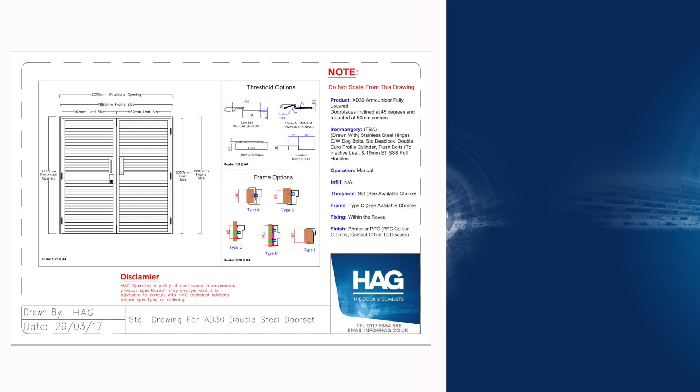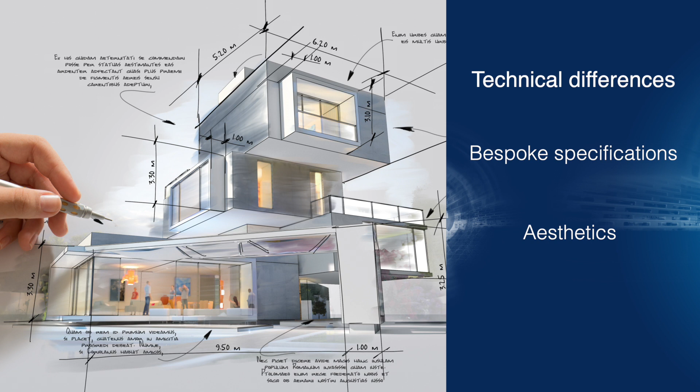We will detail the technical differences between various products, as well as bespoke specifications, aesthetics and accessibility, as instructed by the Equality Act 2010 and in conjunction with approved Document M guidance, along with energy performance.

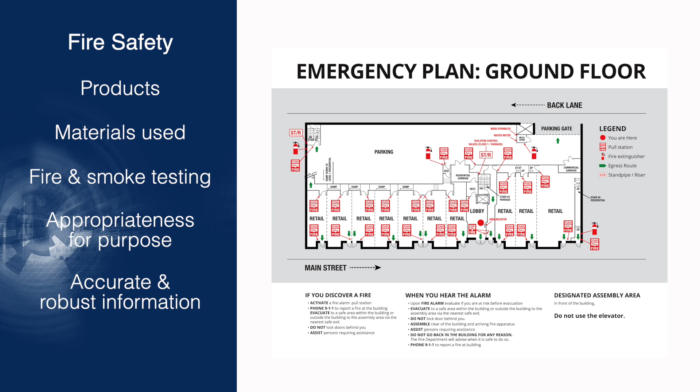We shall talk further around the crucial and ever-focal area of fire safety by providing clear and concise technical information about the products, the materials used, fire and smoke testing, appropriateness for purpose, and how this accurate and robust information can help you in your wider design perspective, but also meeting the practical needs of the fire strategy plan.

This will be in conjunction with the recommendations and guidelines as laid out in British Standards BS 9999 for commercial premises and BS 9991 for residential dwellings.

Finally, we shall discuss inappropriate applications, examples of how inaccurate technical information might lead to an unsafe or unwise specification and how this can be adjusted to an appropriate application, and long-term maintenance, what and how you might need to consider and factor this into your design and specifications, before concluding the training video and moving on to the assessment questions to check your understanding of what we have covered.

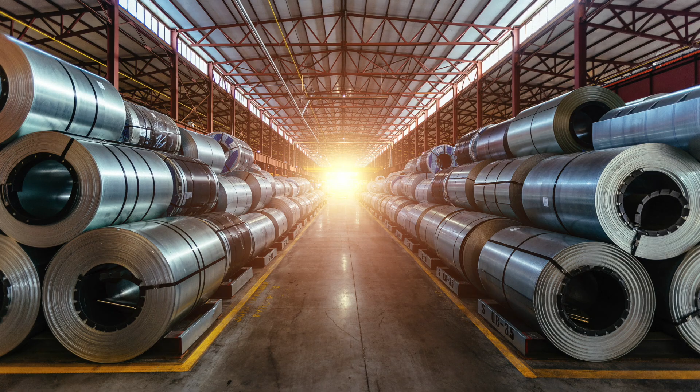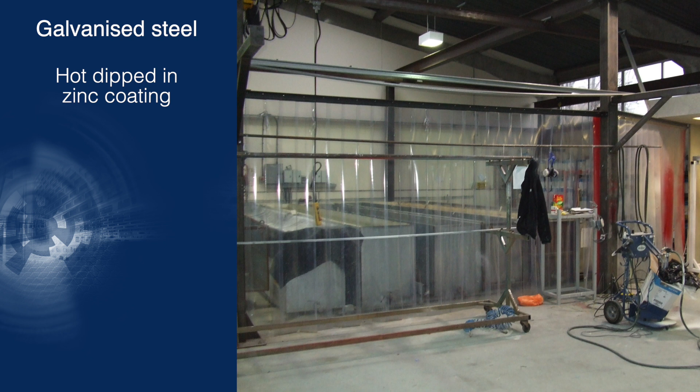There are various classifications and grades of steel, but for the purposes of this training video, we shall discuss galvanised steel and Magnelis steel. Galvanised steel is steel that has been hot dipped in a zinc coating. This protects the metal from the effects of rust. The hot dip process is unique, producing a coating which is bonded metallurgically to the steel.

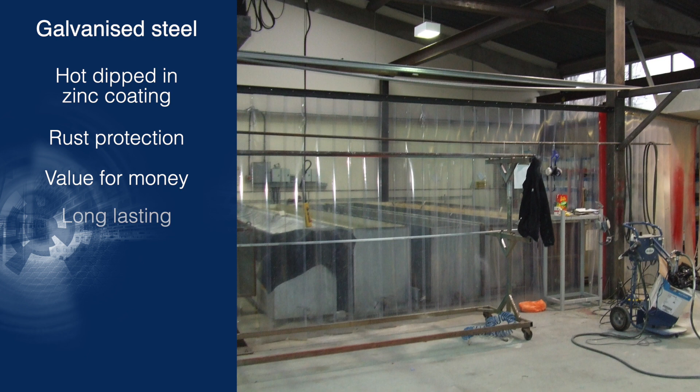The benefits of galvanised steel have always been recognised as good value for money, long-lasting, reliable, easy to maintain and provides instant protection. Magnelis steel is an alloy composed of zinc, aluminium and magnesium.

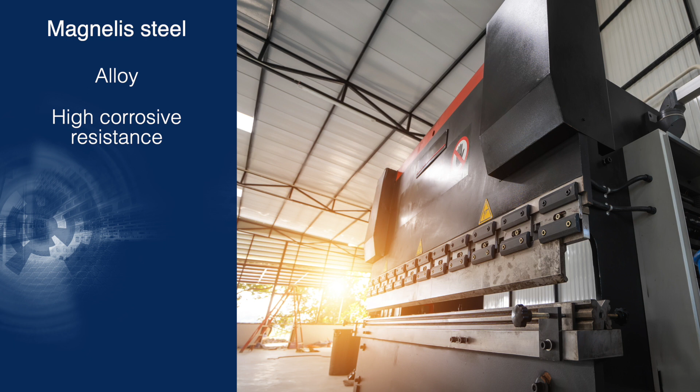It offers a similar aesthetic to galvanised steel but has many different benefits. As a steel-coated product, Magnelis offers a high corrosive resistance that can be up to 3 times better than that of galvanised steel. It is therefore also able to withstand some of the harshest environments in the world, particularly where there is exposure to ammonia or chloride.

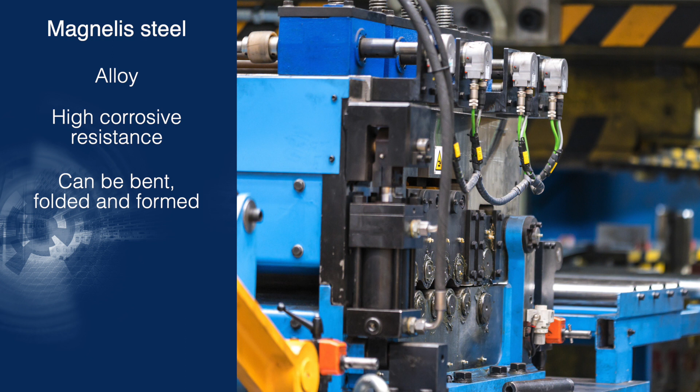Magnelis steel can be bent, folded and formed to provide a consistent, reliable finish. As the steel is already coated, the manufacturing time is significantly quicker.

Steel is not only 100% recyclable, it is also currently the most recycled material in the world. Just as designers and architects engage in schemes such as BREEAM, it is as important that manufacturers should recognise the benefits of sustainable materials and their impact in environmental performance.

British Steel has prioritised the use of external recycled content in recent years, and they are certified as good in relation to the standard as shown here.

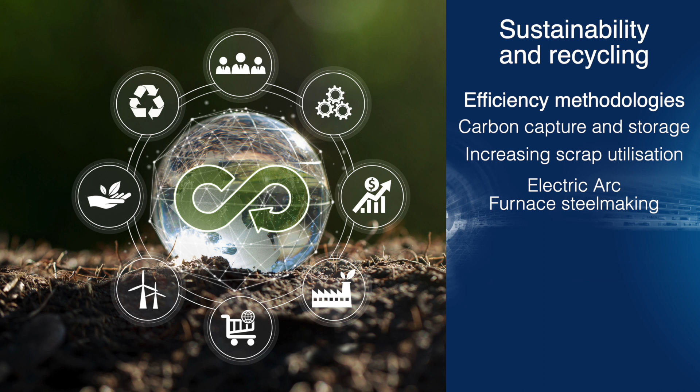UK importers of steel and manufacturers have a responsibility towards sustainability and recycling too. Therefore, when specifying these products, you can do so in the knowledge that you can secure additional credits under the various sustainability schemes as shown here.

It is imperative that your steel doors are regularly serviced, whether mechanical or manual. Full details of servicing obligations can be found in Regulation 5 of the Workplace Health, Safety and Welfare Regulations 1992. This should also be assessed in conjunction with the Fire Safety Order 2005, where it states that all emergency doors must be regularly serviced.

According to the local government association, failure to provide adequate fire safety measures can be punished by a fine, which is currently of up to £5,000 in the Magistrates' Court, or by an unlimited fine and/or 2 years imprisonment in the Crown Court.

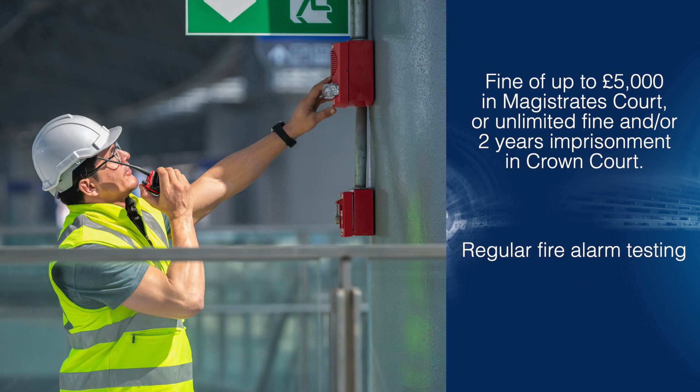Fire alarm testing by the building management's team should be carried out on a regular basis. Testing that the steel door sets are in full working order and close when they receive the signal from the fire alarm, if they are mechanical, should also be incorporated into these routine fire checks.

Following the Grenfell tragedy in 2017, a review was conducted of the existing fire safety and building regulations. This led to the establishment of the new Building Safety Act 2022, which is now in force. This key piece of legislation has been implemented to enhance building safety and change the way in which buildings are designed and constructed. Alongside this, the Fire Safety Act 2021 was also introduced.

This Act provides further clarity around where the responsibility lies for managing and reducing the risk of fire posed by the building's structure, most notably in relation to external wall systems, such as windows, balconies and entrance doors.

For a full summary of the Act and to understand how this new legislation relates to steel door specification, please visit www.gov.uk. A further amendment to government legislation as a result of the Grenfell inquiry is the introduction of Regulation 7 within the approved documents Part B.

Part B contains guidance on fire safety, including means of escape, fire spread, structural fire protection and fire service access, and bans the use of combustible materials in external walls. Please refer to www.gov.uk to read more about the key changes to this specific legislation and how it affects you.

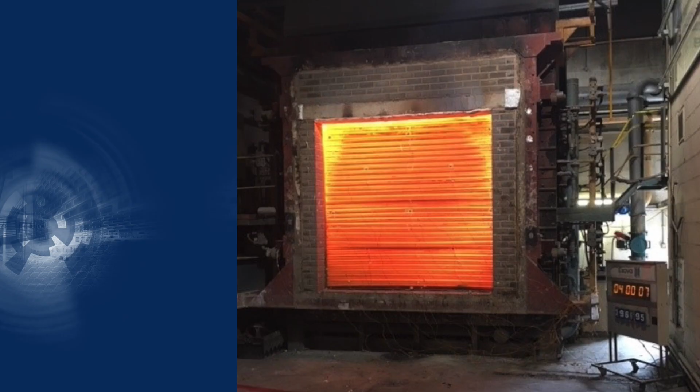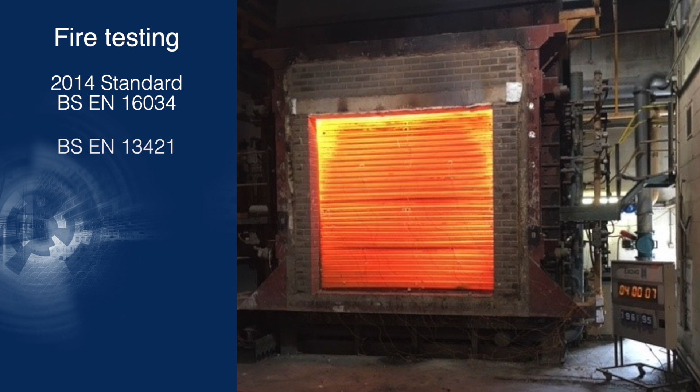In November 2019, new government legislation was brought into effect. All new fire products must be fire tested to the 2014 standard BSEN 16034, CE marked to BSEN 13421. Products tested to the 2008 standard are prohibited by law. It is essential that you check this before specifying a fire protection product, as products tested to the 2008 standard are still being marketed in the UK.

With regular maintenance and testing of steel doors, your premises will be compliant to the current Health and Safety Act 1974, which stipulates that all equipment should be suitable for its intended use, safe to use, in good repair and subject to a programme of maintenance.

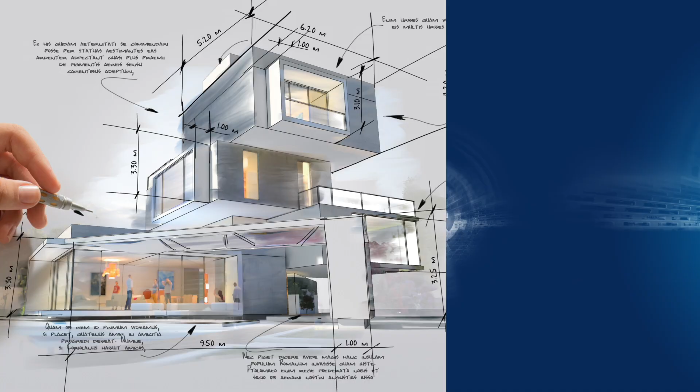www.hse.gov.uk. The key considerations to specifying steel door products and the designer's main duties, as just outlined, are to research and select products accordingly that meet the previously described areas, which include but are not limited to statutory and regulatory compliance, sustainability, and inclusive environments.

To ensure legal, safe, compliant, fully tested products are specified to avoid any risks arising during the build, the use of the products, or the maintenance of the products within the building once works are complete.

Now we shall look at ways in which you can meet your specification needs by discussing energy performance, product technical specifications, bespoke specifications, aesthetics, inappropriate applications, and long-term maintenance.

We shall start with energy performance. When incorrectly specified, doors can have a devastating effect on a building's insulation system. This is even more pertinent where the goal is performance related to building certification.

It is estimated that the carbon footprint of opening the front door of your home on a cold winter's day is 3 grams CO2e. This rises to a comparatively staggering 83 grams CO2e when big electric doors open into a large stairwell on a cold windy day.

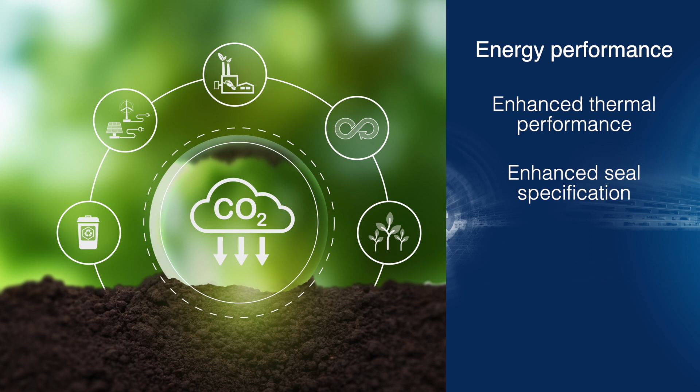Enhanced seal specification. Standard seals are offered to provide good value for money. However, if one of your goals is to prioritise energy efficiency, you can select from a bespoke range of seals that enhances the overall seal effect.

Selecting manual over electronic operation. Certain steel door solutions are offered in either a manual or electronic operation.

In some circumstances, your overall specifying criteria may override your ability to choose. However, where possible, you may wish to opt for manual operation to minimise the energy used to activate the open door.

The appropriate use of glazing and louvered panels. There may be times when you are requiring louvered panels to offer ventilation and bidirectional airflow, or glazed vision panels to comply with the Equality Act 2010, or Approved Document Part N.

When you do have a need to specify these features, ensure that you are being offered high-quality double glazing to manage your building's energy performance accordingly. Where possible, don't add these features unless a necessity, so you aren't creating extra areas in the door for energy loss.

Sizing of the door sets. Whilst large stylish steel doors in a brushed steel finish opening onto an expansive atrium entrance hallway will look impressive, consideration must be given to the size of the opening in order to fully enhance energy performance.

It's a basic principle: the larger the opening and size of the door, the more energy from the building will be lost each time the doors open. Scale back large openings with the use of side and over panels, allowing for a smaller door size whilst not compromising on the aesthetics.

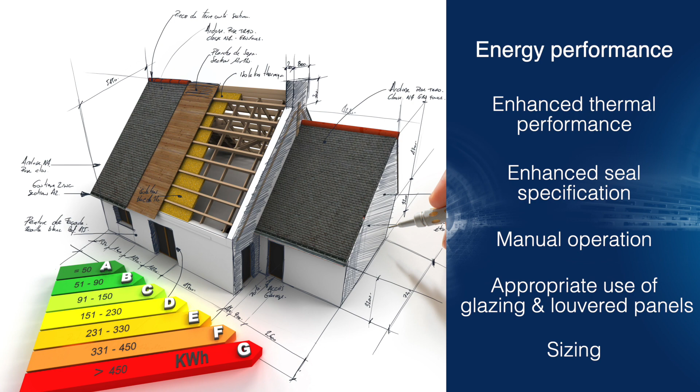Now we shall discuss steel door products and their technical differences, bespoke specifications, and aesthetics in more detail to show you how you can use them to meet your needs.

A general purpose steel door is versatile, offers a medium level of both security protection and thermal insulation, and is suitable for high frequency use.

You can specify from manual or electric operation, and they are available in single or double leaf openings to a maximum height of 2,900 mm.

They are available in a range of finishes from powder coating, wood grain, and PVC laminate. Stainless steel door skins are also available, which can be brushed, polished, or patterned.

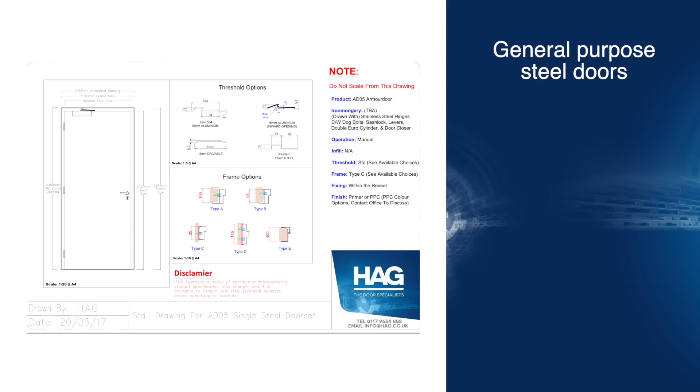The wood grain PVC laminates come in 3 finishes: beech, golden oak, or Nordic oak, to suitably complement your aesthetic look. The 2 door blades are lock formed together by bonding skins around a rigid core using a no weld construction technique.

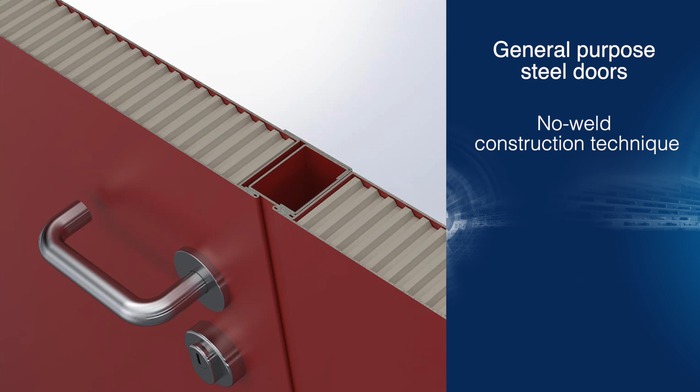As standard, the door thickness will be 45 mm and would have a self-supporting resin-impregnated honeycomb core with a thermal U value as shown on screen.

The door frame is constructed from folded 1.5 mm Magnelis steel, with an upgrade option of 2 mm, and are supplied with an adjustable subframe which provides 30 mm tolerance for ease of installation on site. The frame is fitted with 4 dog bolt hinges as standard.

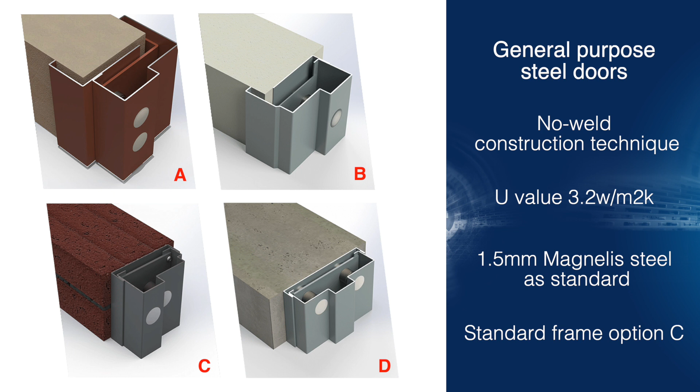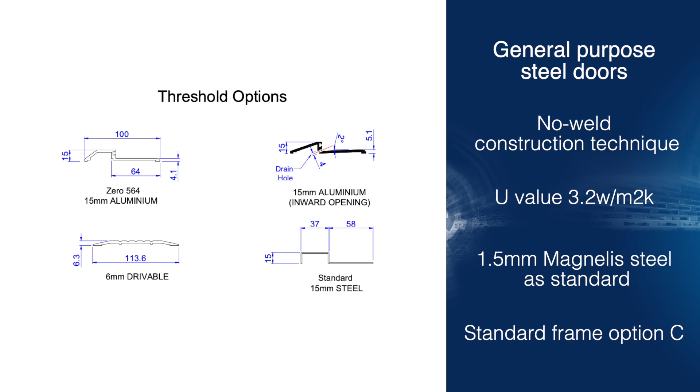There are 4 profile options as shown on screen, with types A and B being available in both inward and outward opening versions. These doors would be supplied with a 15 mm rebated threshold, which is in compliance with the Equality Act 2010. There are 4 further options shown here, including a ramped drivable threshold.

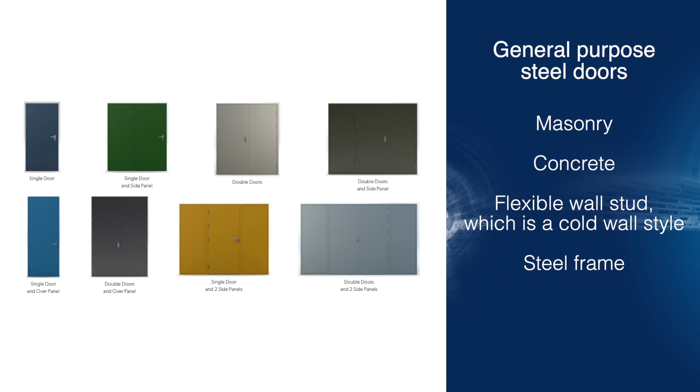Fire doors are mandatory in all buildings, whether residential, commercial or industrial. They must open in the direction of escape, must be a manual door not sliding or revolving, and must not be locked or fastened in any way that they cannot be easily and immediately opened by any person in an emergency. Steel doors are perfect to meet these needs as they offer a medium to high level of security protection whilst also being suitable for high usage.

Ensuring that your fire exit signage is both correct and clearly visible is paramount. The sign should clearly indicate that this is a fire exit door and to keep clear. The keep locked sign must be present where applicable. Specific legislation relating to signage can be found in the Health and Safety, Safety Signs and Signals Regulations 1996.

The sizing options, finishes, construction and infill options are similar to a general steel door. However, fire exit steel doors are supplied with a single or 2-point panic bar or push pad as standard. To comply with Approved Document Part M, visibility glazing can be specified. There are minimum zones of visibility as shown on screen to achieve Part M compliance.

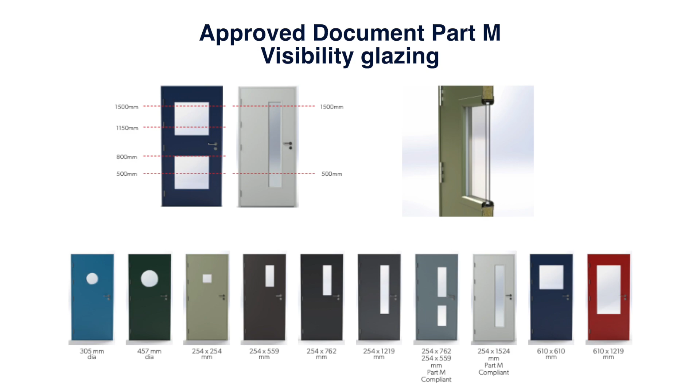Fire-resisting doors will generally be offered in 3 different levels of fire resistance, also known as integrity and specified as an E number. These are 30, 60 or 120 minutes.

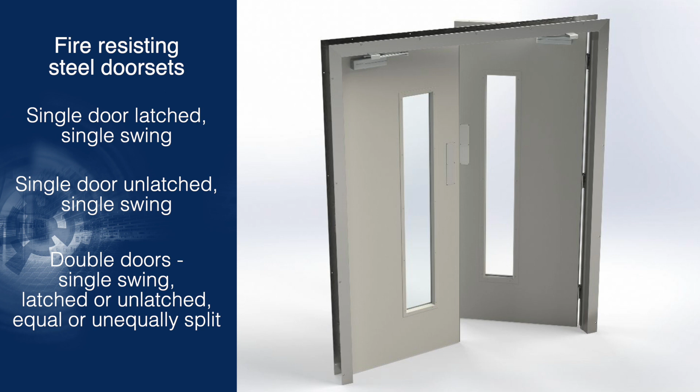All fire steel doors are custom made and have the option to be single door latch single swing, single door unlatched single swing, or double doors single swing, latched or unlatched, equal or unequally split. The maximum size will vary depending on the specified fire rating.

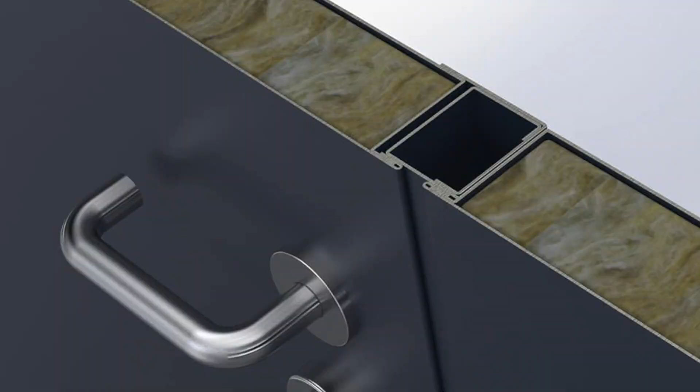A standard infill should be self-support resin impregnated honeycomb, with an option of mineral wool should you need to improve acoustic performance. The door frame construction will be screw and tab, with 4 adjustable fixing feet per jamb. A variable subframe accommodates site tolerance up to 30 mm, and the frame will be fitted with 3 Class 13 hinges with 2 dog bolts.

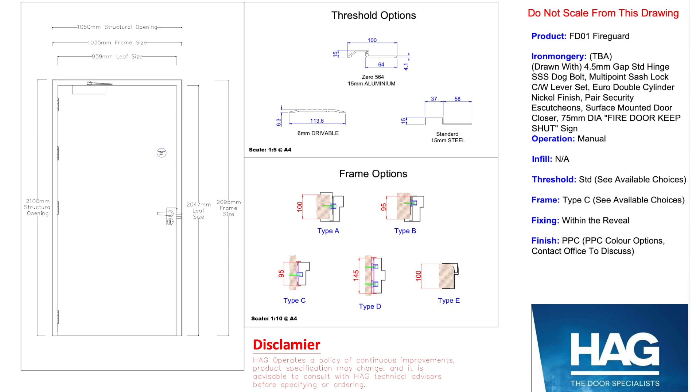Similarly to general steel doors and fire exit doors, fire doors can be used in all walls constructed of steel frame masonry, concrete and similarly rated stud wall. It is worth noting that when using timber or steel stud walls, you must ensure that you have adequate evidence that the wall can support a steel fire door under fire conditions.

120 and 240 rated stud wall constructions must have the wall's reveal face protected by a fire-resisting board to protect the wall construction. The addition of visibility glazing allows for Part M of the Building Regulations compliance, which states that doors across routes of access should have vision panels.

The vision panels are constructed by welding 1 mm of cold rolled steel, screwed together from one side with laminated glass and intumescent fire-stopping gel as standard. A common option would be a 19 mm double glazed unit. Other custom sizes of glass are available at additional cost.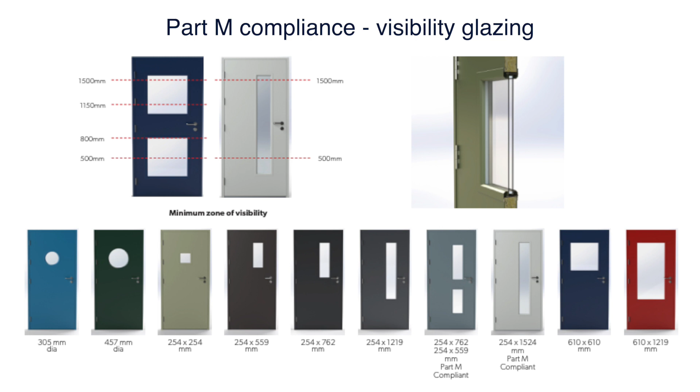Vision panels can be round, rectangular or square. However, compliance to Part M would only be relevant to the shape and placement of the panels, just as shown on screen. Certain sizes of vision panel would exceed the maximum area for a 240-minute fire-rated door, as it would compromise its ability to protect against fire.

It is possible to use these products in a larger opening with the use of side and over panel arrangements. These could be solid or glazed, subject to your requirements. Standard sizes are detailed on the screen.

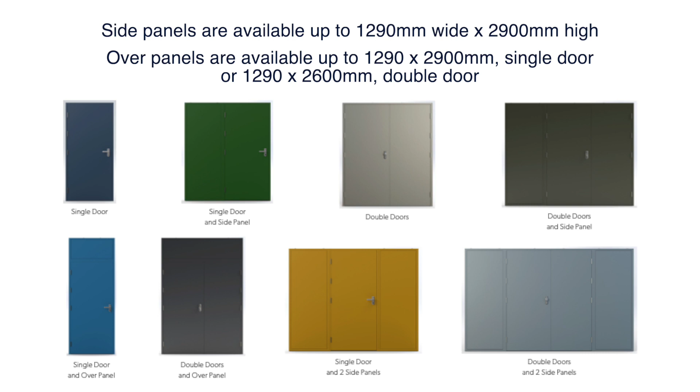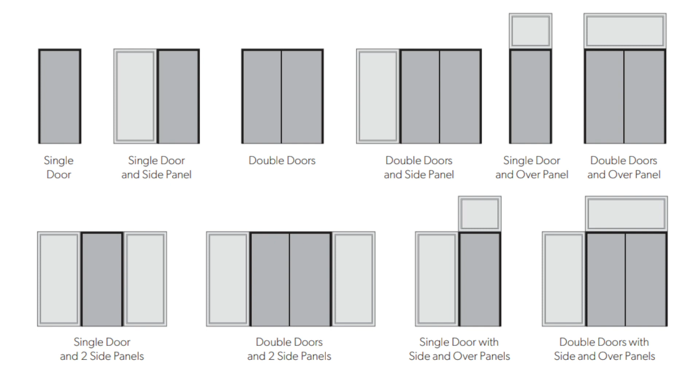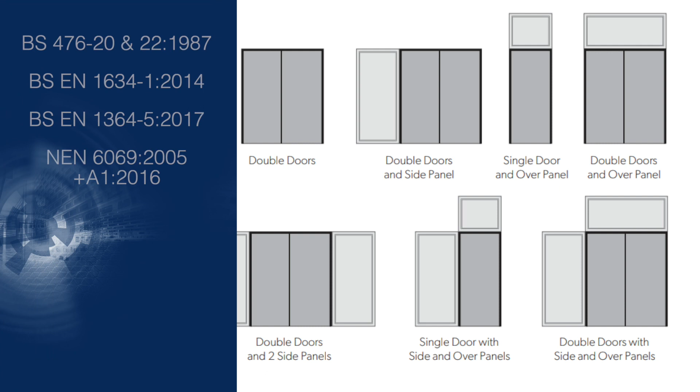Where ventilation is key, you also need the protection of a fire-rated steel door. You can opt for a louvered panel in the form of a high-performance intumescent air transfer grille. Examples of areas where this might apply are a plant room, stores, computer room or manufacturing areas.

These louvered grilles have been tested to the standards as shown on screen. They can provide up to 60 minutes of resistance to fire, or 120 minutes when used in conjunction with a grille cover. Standard sizes range from width and length of 98 mm, increasing in increments of 25 mm up to a maximum of 598 mm.

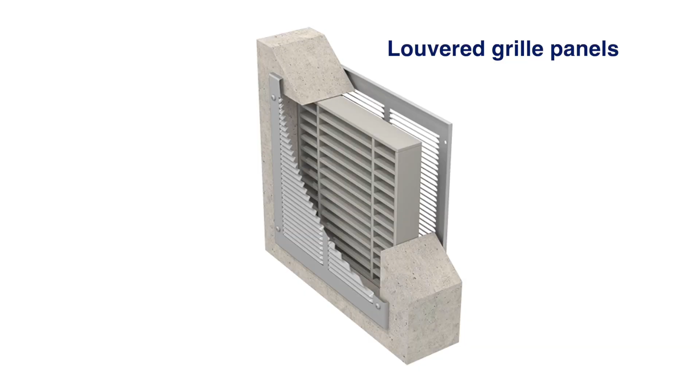These are constructed from 40 mm thick intumescent air transfer grille, with 2.5 mm thick steel cover grilles, one on each side, which are face fixed to both sides of the door. The air transfer grille expands under the effects of heat, therefore sealing the unit and preventing flames and smoke from passing through it. The air transfer grilles are manufactured from PVC slats with an intumescent core.

Steel cover grilles are manufactured from 20 SWG mild steel with preset angled vanes at a 30-degree downward deflection and 8.5 mm pitch. These vanes allow for bidirectional airflow. The grille is then screwed and bedded in intumescent sealant to guarantee the seal.

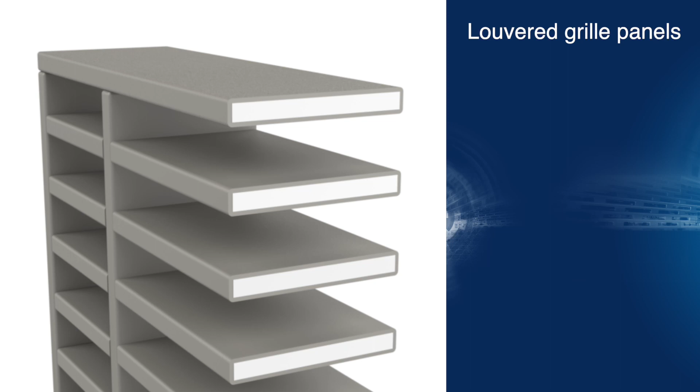Other benefits include no moving parts, not prone to clogging, no access panels required, robust construction, and no maintenance. They provide excellent airflow characteristics, which results in low sound power level, efficient operation, as well as still giving you the excellent fire integrity performance that you require in such settings. Ideally, they should hold the Certifire accreditation.

Louvered steel doors are to be specified for locations where you require continuous airflow, such as plant or boiler rooms, or refuse rooms. They offer a medium level of security but no thermal protection, are manually operated, and can be manufactured in both single and double openings, with a maximum recommended height of 2,900 mm. Optional side and over panels can then be added to suit larger dimensions.

Louvered steel doors are made to order and can be offered either fully louvered or as a steel door with louvered panel inserts, offering various levels of ventilation. All louvers are available in steel or aluminium.

Steel is more robust, therefore providing you with a product meeting a higher level of security versus the more traditionally lightweight aluminium option. The louvered door has a leaf thickness of 45 mm, and the steel door blades are made from 2 mm corrosion-resistant Magnelis steel as standard.

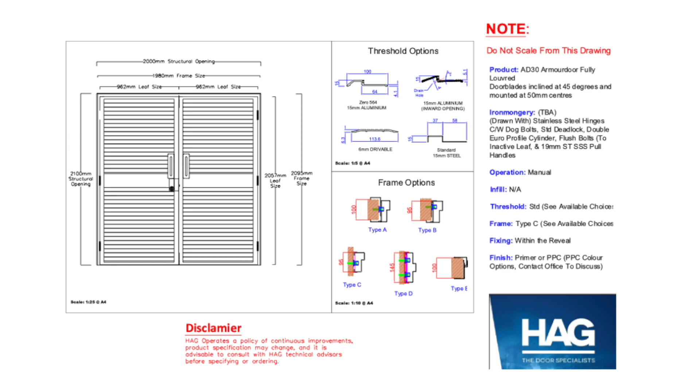The louvered steel door is supplied with a variable subframe to allow up to 30 mm tolerance for site installations, and the frame is fitted with 3 stainless steel hinges and 2 dog bolts per hinge as standard. The door is supplied with a standard 15 mm rebated threshold. Drivable thresholds are also available on request.

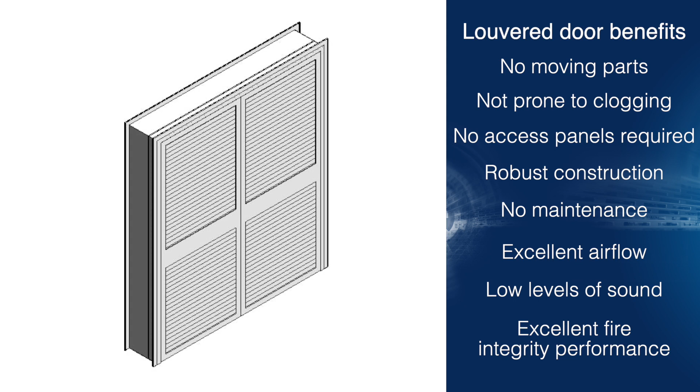If your specification requires a higher level of strength and security, you can select a 2 mm galvanised steel louvered vane that is welded at every junction for added strength. These louvers are certified to PAS 24 and are approved by Secured by Design.

There are various bespoke hardware options that will include mortise lock and latch options, as well as mortise multi-point locking options. Additional locks can be fitted with panic bolts and latches to provide nighttime security. Locking and access control options might include mechanical keypad, electric strike, electromagnet lock, either surface mounted or with a concealed mounting.

It is possible to specify steel doors with insurance approval for use in areas of high risk. This is called LPS 1175 and is run by the Loss Prevention Certification Board. These door sets are designed to offer an enhanced level of security for a wide range of premises, from domestic all the way through to premises that might be at high risk of attack by experienced intruders.

They are manufactured by specification to meet security rating and insurance levels of Security Rating 2, SR2, through to SR5. These steel doors can be used in areas of high usage and generally offer a medium level of thermal insulation. Each door has internal reinforcement and specialised construction designed to resist sustained attacks using an extensive range of tools. The tests on the SR security steel doors are carried out under laboratory conditions using attack times and tools defined by the security rating that the product is suitable for.

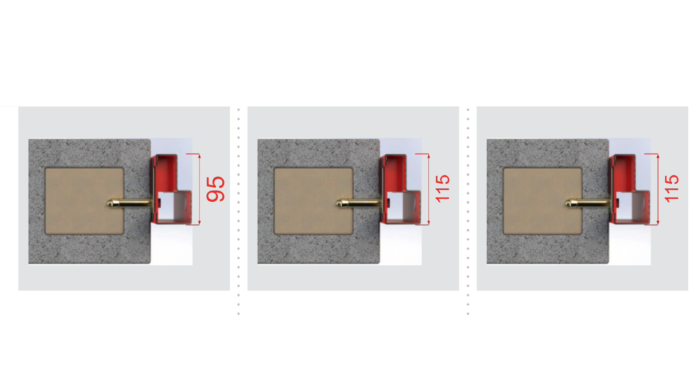The wall construction opening must be fully formed from a material with sufficient composition strength to withstand a minimum load or fixing as detailed here, such as concrete, brick or steel frame. Aerated concrete is not recommended, and hollow brick or blocks should only be considered if suitably backfilled with materials that will provide adequate strength to take the frame fixings.

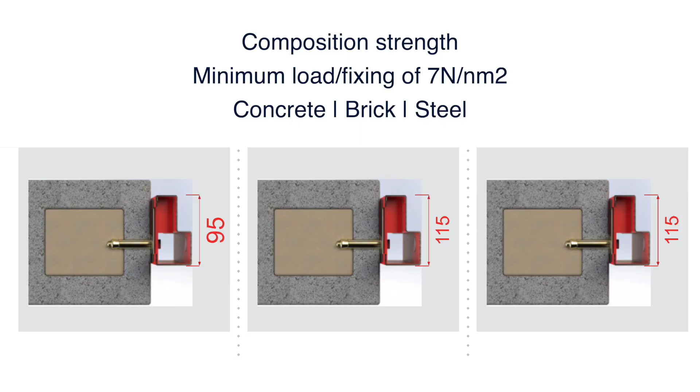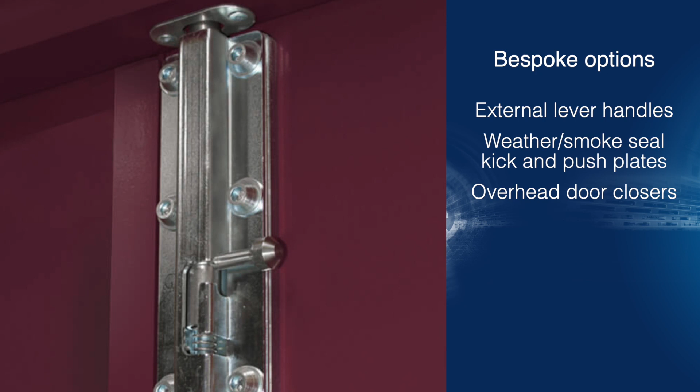Most SR doors can be fitted with a selection of vision and louvered panels without compromising the levels of security. Other bespoke specification options might include external lever handles, weather or smoke seal kick and push plates, overhead door closers, heavy-duty door stays, alarm contacts, electronic lock status monitoring system.

A wide range of internal and external locking options will be available, complying with the SR certification, including a single-point locking device, emergency escape, key-driven and electronic mechanical access control systems. Fire escapes can be fitted with hardware compliant with BSEN 1125 or BSEN 179.

Hinge options will be matched to the SR door you specify. Generally, all SR doors will have a minimum of 3 stainless steel hinges, which have been endurance tested to over 2 million cycles, recessed into the door leaf. Independent steel hooked dog bolts will then be used with a reinforced anti-crush fixing.

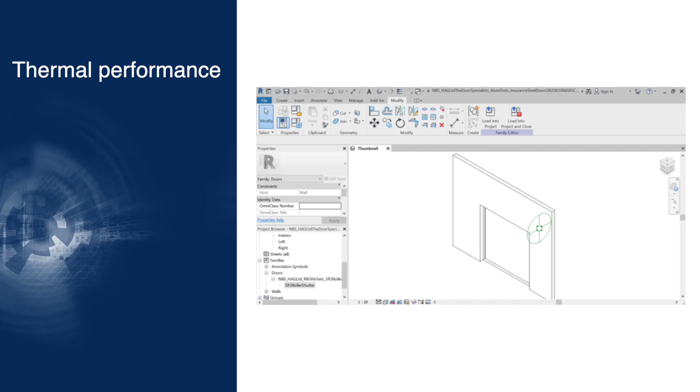There are many factors that might affect the thermal performance assessment of these specialist doors. The U value for a standard SR door is calculated to be up to 2.5 watts per meter square Kelvin. When the same door was fitted with a vision panel, the U value can go up to 3.2 watts per meter square Kelvin.

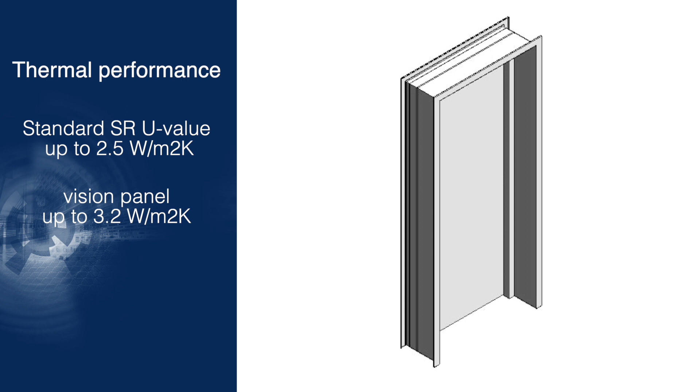Door hardware options will all be high security, single and multi-point locking with a range of emergency exit features. These should be certified according to LPS 1175 and the relevant SR level.

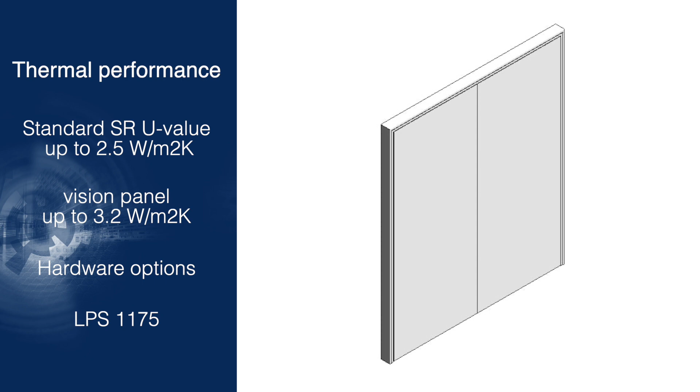Blast-resistant steel doors are specifically designed and tested to the explosive resistance standard. These steel doors are manual operation and come with 3 locking points. High-security patent-protected cylinders, which reduce the risk of key copying, are used for additional security. Powder coating and alternative finishes are available for bespoke specifications.

Blast-resistant steel doors would typically have a leaf thickness of 48 mm, with an infill composed of solid timber, with integral steel stiffeners, and the door blades will be fitted with anti-jemmy protection. Door frames will be constructed from folded and welded 1.6 mm Zinc or Alu-Zinc.

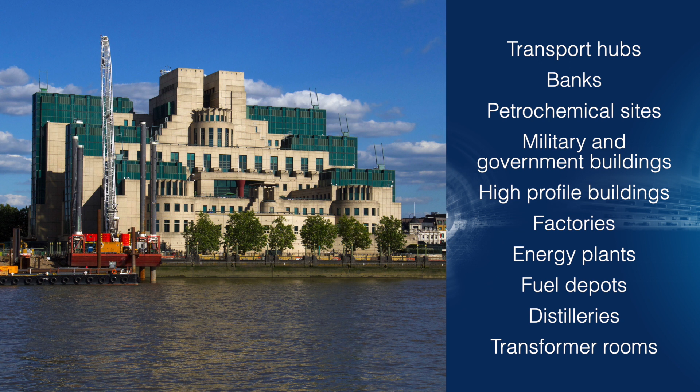Blast doors are used in areas where there is a potential risk of intentional or accidental blast attacks. These typically include transport hubs, banks and petrochemical sites, amongst others shown on screen.

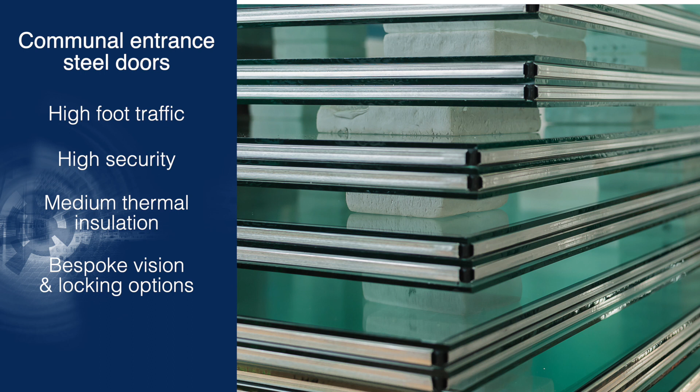Communal entrance steel doors are designed for high foot traffic, provide high levels of security and a medium level of thermal insulation. Double glazed units allow for through vision, and locking systems can be adapted to include electronic access control.

Finish options should be available in a standard range of powder coat colours, as well as bespoke options of wood grain, PVC laminate and stainless steel.

Communal entrance steel doors would typically have a leaf thickness of 48 mm, with infills that vary based on your anti-vandal protection and thermal requirements. These doors can be customised to meet your needs, with a variety of access panels, door controls, concealed maglocks, alternative aperture shapes, and the ability to specify the panel to be solid, glazed or louvered.

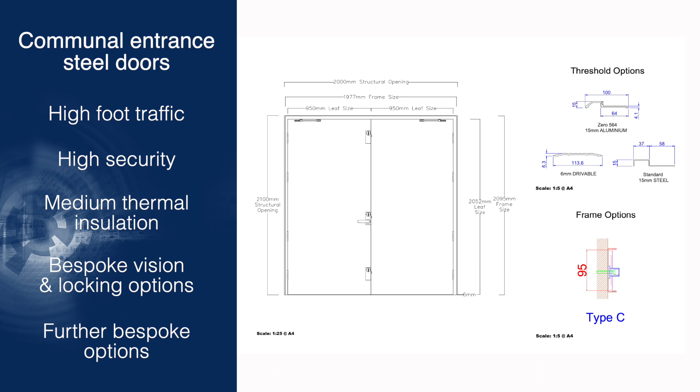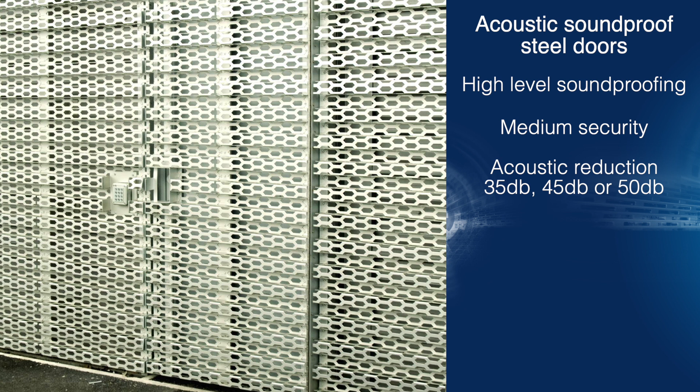An acoustic soundproof steel door is designed for high levels of soundproofing, whilst also providing a medium level of security. These manually operated doors can be specified to provide an acoustic reduction of 35 decibels, 45 decibels or 50 decibels. An acoustic door has a leaf thickness of 56 mm, a rock wool infill, and the door frame will be constructed from folded 1.6 mm Magnelis steel.

In most professional settings, there will always be a combination of areas that are private and others that are public. For example, a hospital will have an open waiting area for patients and visitors, but at the same time have offices where exams and consultations take place. For a workplace to adapt its space for operational needs, there must be a way to separate the private and public spaces. Acoustic doors are a great solution in situations where a quiet space is needed for working or holding conversations. Benefits of acoustic doors are noise reduction, privacy, variety of applications, different standards of noise reduction, and full customisability.

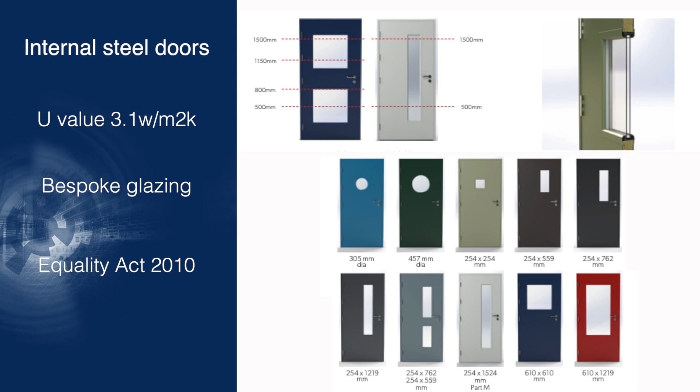Bespoke vision panels will be double glazed as standard, with different size and shape arrangement options available to suit your specific needs, several of which are compliant with the Equality Act 2010. Standard colour finishes of powder coating will be offered, but optional finishes of PVC laminate, stainless steel in brushed, polished or patterned, and finally wood grain PVC laminates. Other items that can be customised can be seen here.

Inappropriately specifying the wrong product to meet your needs will ultimately compromise a key feature of your design. While security is extremely important, fire safety and fire protection of a building is the one thing that should take precedence according to the Building Safety Act, the Fire Safety Act 2021, and Fire Safety England Regulations 2022. Therefore, you should always check the technical specifications of fire protection products provided by a manufacturer to ensure that you are specifying the right product to meet the fire safety strategy for the building.

An inappropriate application would refer to using a fire-resisting steel door that was only tested to the 2008 fire standard rather than being tested and compliant to the 2014 standard. Another example would be specifying the fire resistance level of E60 when you needed it for 240 minutes, in which case it should have been E240.

A final example of an inappropriate application would be using a general purpose steel door at the entrance to a plant room and omitting the addition of a louvered panel. The lack of ventilation could cause machinery within the plant room to overheat and could result in it not working properly, stopping working entirely, or even cause a fire.

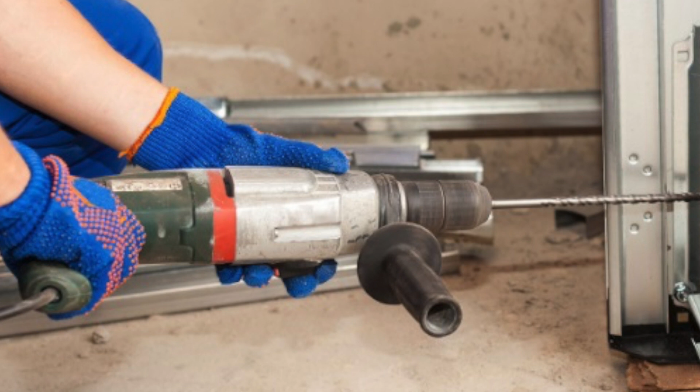As per the Workplace Health, Safety and Welfare Regulations 1992, Regulation 5, equipment, devices and systems such as steel doors should be maintained and cleaned as appropriate, be in an efficient state, in efficient working order and in good repair. In order to ensure this, doors should be subject to a suitable system of maintenance, specifically in relation to steel doors. Regular servicing is important not only to ensure that your health and safety records are kept up to date, but also to ensure the product's longevity.

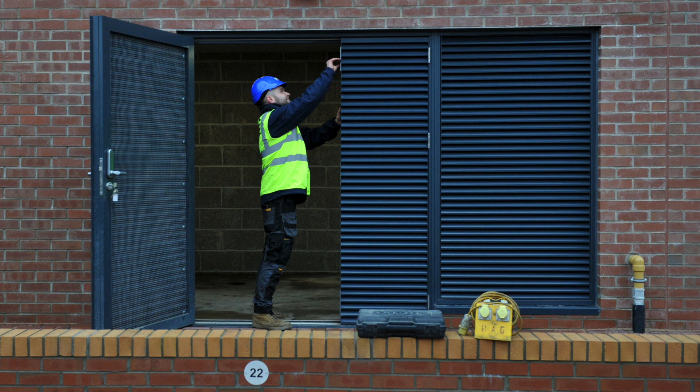By having regular servicing, it allows the opportunity to identify potential issues before they become significant problems. Undertaking this and keeping up-to-date records allows confidence that a safe environment is provided for employees, tenants and other members of the public who may be in the vicinity.

Finally, steel doors and door sets should be designed and installed to allow full access to both manual hinges and electronic control panels on a daily basis, for regular checks from the building's maintenance team, as well as easy and quick access for longer-term maintenance.

That concludes the main part of this RIBA-approved CPD training video. We have covered the following areas as initially set out.

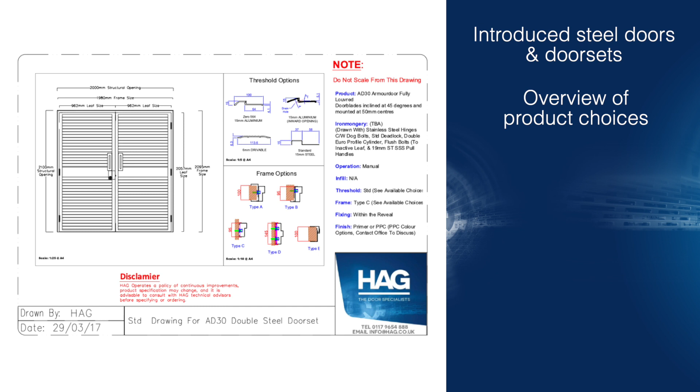We introduced you to steel doors and door sets and their technical specifications. We discussed how different products can be used to fulfill your needs, including bespoke specifications, accessibility, energy performance and long-term maintenance. We discussed statutory and regulatory compliance, including the ever-focal area of fire safety. We considered how products can be specified to meet your inclusive environment needs. We talked about sustainability and provided examples of appropriate applications.